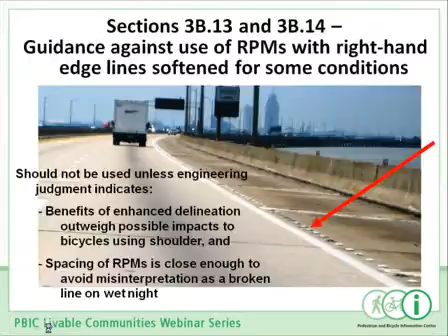Again, the safety study by UNC was quite clear on this, and the way it's written in the manual now is to apply to new marked crosswalks. In other words, this criteria should be used in decisions that are being made from now on of whether to put in a crosswalk. As we all know, there are many existing marked crosswalks out there under these conditions that don't have other substantial measures with them. It's obviously good advice to try to at some point go back and reevaluate all of those existing locations. But the words that are in the MUTCD as of now do not require that yet.

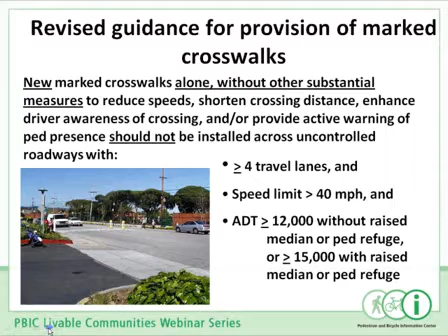There is a whole new chapter that's been added to Part 3 dealing with pavement markings at roundabouts. And of course this affects pedestrians and bicyclists because of the operation of a roundabout. The text and the figures all address the locations of the crosswalks adjacent to the roundabout, what to do with bike lanes approaching a roundabout. So a lot of new standards, guidance and options concerning pavement markings at roundabouts.

Colored pavements is a kind of a continuing issue, has been for some time. There's a lot of interest in using colored pavements for various things. And particularly at crosswalks, there has been an issue that really started out with the idea of brick crosswalks. A number of communities for some time now have been installing brick crosswalks really as part of their streetscaping projects for aesthetic enhancements. It's really not intended to try to communicate a message to pedestrians or to drivers.

It's predominantly for aesthetics. And under those situations, as long as you've got the white lines that actually establish the crosswalk, there's no issue with putting bricks or other types of colors or patterns within the crosswalk, as long as it doesn't compromise the conspicuity or the contrast of those white crosswalk lines, and as long as the color is not a traffic control color.

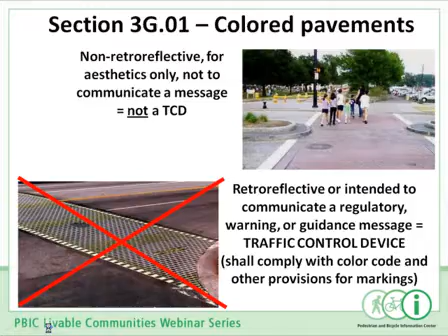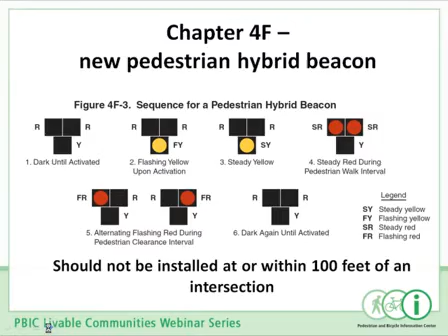This is a new provision. It's always been good engineering practice, but now it's in the MUTCD as a requirement, and that is that if the timing of the pedestrian signals is only giving pedestrians enough time to cross to the median, basically requiring them to cross in 2 separate stages, 2 separate cycles, then it's now required that pedestrian signals, push buttons if it's an actuated phase, and signs are required in the median. It's basically not appropriate to strand a pedestrian in the median and hope that they figure out what to do.

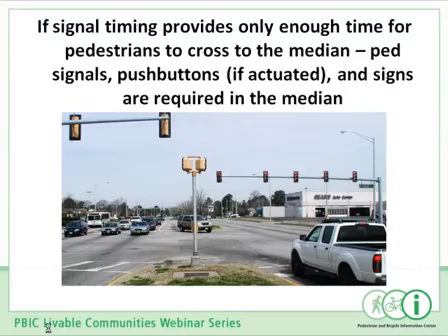In the proposal that we had put out in 2008 for the text of the next manual, we had proposed changing the meaning of the flashing orange hand when it's accompanied by a countdown. The issue is obviously that in a sense we're sending mixed messages here.

The previous meaning of the flashing orange hand is that if you're still on the curb and haven't started crossing yet, you're not supposed to start crossing. But if you have started, you're out in the crosswalk, the flashing orange hand means that you can continue crossing and finish. The countdown is really providing more information than has ever been provided before.

And obviously we know that pedestrian signals are timed based on a certain walking speed that many people can walk faster than. And we know that where countdowns are installed, a lot of people do leave the curb after the flashing orange hand comes on, and they are able to finish their crossing safely and well before the conflicting traffic starts moving. So we had proposed to change the meaning to basically legalize that.

Based on the comments we received, our decision was to not adopt that change. There are concerns, and very valid concerns, about having 2 separate meanings for the flashing orange hand, depending on whether a countdown is present or not, and concerns about the ability to educate particularly young school children when we have 2 separate meanings like that.

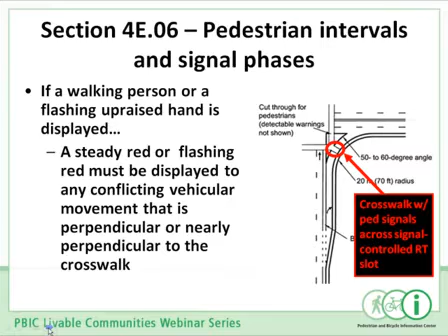It's definitely a conflict. So anyway, now there's specific language in the MUTCD to require that either a steady red or a flashing red has to be displayed to any conflicting vehicular movement under this kind of a situation.

We talked about walking speed of pedestrians. You're probably aware of some of the studies that have been done that have found that the 4 feet per second, which has been in the past the recommended walking speed for calculating pedestrian clearance time, doesn't provide for a large enough percentage of the walking population.

And there's a new figure in the manual, figure 4E2, which kind of clarifies and hopefully makes it easier to understand the relationship between the pedestrian intervals and the vehicular intervals. This is a fairly complex and complicated issue that a number of people have had difficulty understanding.

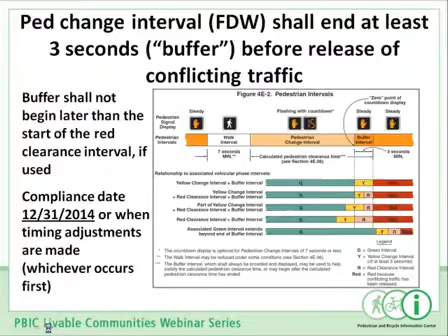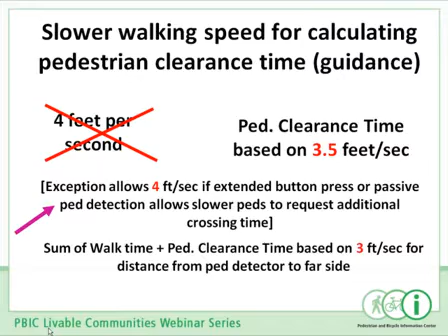And one thing I did want to mention about this exception, there is an exception that allows the use of a 4 feet per second walking speed to calculate that pedestrian clearance time if you have an extended button press or some other means to allow the slower pedestrians to request additional crossing time.

And I just wanted to point out that this is not what we're talking about. We're not talking about having to pay to insert coins to receive your extra crossing time. It's really just a matter of an extended button press, as in that sign that Bruce had displayed earlier.

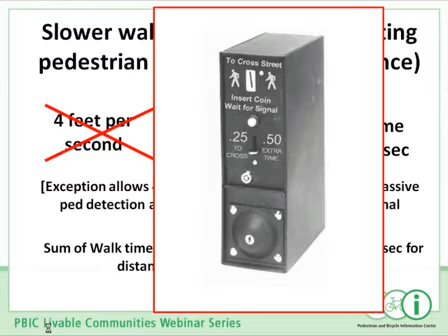The leading pedestrian interval is now in the MUTCD. Again, this has been a rather common practice that really wasn't in conflict with the MUTCD in the past, but now there's words in there that specifically allow it and describe how to do it.

The countdowns are now required for all pedestrian signals where the pedestrian change interval is more than 7 seconds. You can use countdowns even if the pedestrian change interval is 7 seconds or less. So basically, many cities are installing the countdowns for all of their pedestrian signals. We know that. But there are some jurisdictions that are concerned that for particularly short crosswalks across narrow streets it might be unnecessary to have a countdown for those conditions. So that's what this provision says, that if it's less than 7 seconds, there's no need for a countdown.

And there is no specific compliance date for retrofitting all the existing pedestrian signals that don't currently have countdowns. That can be done when the ped heads reach the end of their service life and are replaced. But in reality, many, if not most, jurisdictions are proceeding straight ahead, basically, with putting in countdowns almost everywhere because they are so popular and they do have a good safety benefit.

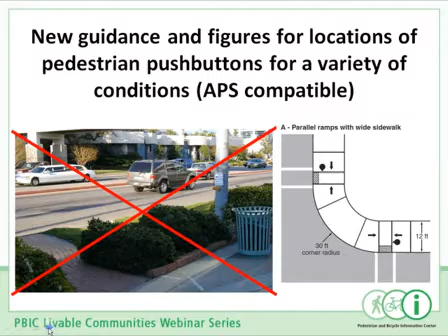So the new manual does basically provide more specific guidance on the location of pedestrian push buttons, tightens it up considerably, and pretty much follows the guidance that had been in the MUTCD earlier concerning APS, accessible pedestrian signal push buttons, very similar to that. And as Bruce had mentioned, the signs that are used with the push buttons are now required to clearly indicate which crosswalk is activated by which push button.

Now APS, talked about that a little bit. The provisions concerning APS have not changed a lot since the 2003 manual. There have been some changes, but one of the main things we did is we combined and reorganized the information on APS into these 5 new sections, and basically makes the material a lot easier to access and follow when you're trying to find provisions concerning APS.

The push button locations, again, similar to what was in the 2003 manual. Basically, they're supposed to be as close as possible to the crosswalk line that's furthest from the center of the intersection. That's shown with the red arrows here. And if there are 2 buttons on the same corner, they have to be separated by at least 10 feet, unless the physical constraints make it impractical.

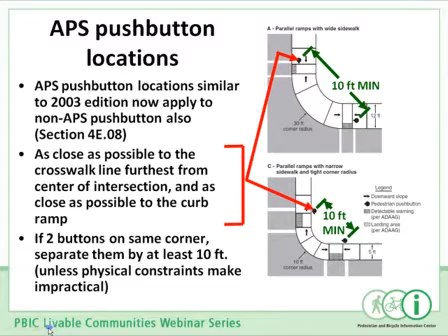APS walk indications, when the walk signal is on. The accessible walk signal has to be both audible and vibrotactile, and obviously the same length, the same duration as the walk interval. The audible type walk signal is now to be a percussive tone, the ticking sound.

Now, the exception to that is if there are 2 buttons on the same corner that can't be located 10 feet apart or more, or if it's on the same pole, then a speech walk message needs to be used rather than audible tone. And the speech walk message goes: street name, walk sign is on to cross street name, with the street name, of course, being the name of the street, like Broadway or whatever. The reason is that when the buttons are closer than 10 feet apart, blind pedestrians have a very difficult time discerning where the ticking sound is coming from. And of course, the vibrotactile walk indication is the vibrating tactile arrow.

The tactile arrows have to be located on each push button. They have to be aligned parallel to the direction of travel on the crosswalk that it's associated with. The locator tone has to be incorporated into each push button, and obviously operates during the intervals other than the walk interval.

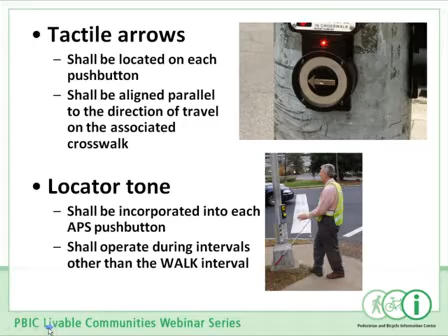The extended push button press is a new way that's in the MUTCD now to call special APS features. You can use it to call for a longer crossing time. You can use it to call for a speech information message. Now that's different from a speech walk message. The speech information message can give information, for example, about the geometry of the intersection, things like that.

And you can also use the extended push button press to call in audible beaconing. The information message, as I mentioned, is only used during intervals other than the walk. The message format is "wait to cross Broadway at Howard," and things like unusual geometry and phasing can also be talked about. So that finishes the markings and signals part, and I will turn it back now to Bruce to go on with the other parts of the MUTCD.

Okay, you'll notice that we seem to have skipped from 4 to 7, leaving 2 other numbers out of it. Part 5, there really weren't a lot of changes overall, basically just keeping it up with the other parts because it overlaps so much for low-volume roads. Part 6 had some changes, not all that many, but none of them were particularly about pedestrians and bicyclists. So we'll leave those out of this presentation as well and move on to Part 7, which is school area traffic control devices.

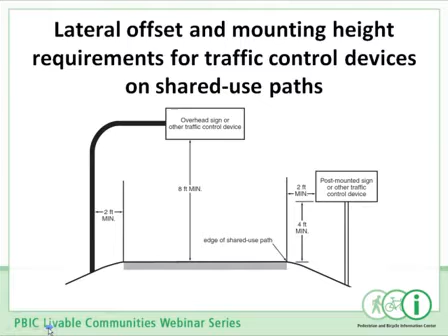The use of bicycle lane regulatory signs and plaques is no longer required where marked bike lanes are present. It is now okay to use pavement markings alone to designate a bike lane. There are recommendations that have been added regarding the placement of bicycle lane signs and plaques if an agency does decide to use them. These changes provide flexibility for agencies that don't desire to use the bicycle lane signs, but they don't restrict the ability of jurisdictions that prefer to use the signs to continue to do so.

And as a result of this change in Part 9, we also had to go back to Part 1, where all definitions are, by the way. At this point, there are no more definitions within the individual parts. But back in Section 1A13, the definition of a bicycle lane was changed to indicate that it could be designated by pavement markings alone, and that signs may be used to supplement those markings, but are not required.

There's a new Bicycles May Use Full Lane sign that's been added for use in locations where it's important to inform road users that the travel lanes are too narrow for bicyclists and motorists to operate side by side. This is a sign that can be used in conjunction with the new shared lane markings that I'm going to be talking about in a few minutes. But they aren't required to be used together. One or the other can be used alone, or both can be used in combination.

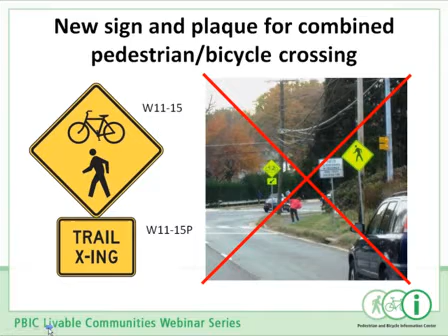Consistent with the proposed changes in Chapter 2C that I talked about earlier in the presentation, the new combined bicycle pedestrian sign and the new trail crossing plaque are also added in Part 9 to provide warning of shared use path crossings that are used by both pedestrians and bicyclists.

There's a new section about object markers for use on shared use paths, and basically what this does is create a smaller size, proportionally reduced so that it would be more appropriate for the lower operating speeds on shared use paths. In fact, the signs are 6 inches wide and 18 inches tall rather than the larger signs that are used for roadways.

Several new bicycle destination guide signs, along with information about their use, were added to provide flexibility and potentially reduce the cost of signing bicycle routes, particularly in urban areas where multiple routes might intersect or overlap each other. Among these signs are new alternative guide signs for bike routes and new bicycle destination and distance signs.

Similar to the object markers, there's a new section regarding reference location signs for use on shared use paths, because some of the paths are long enough and are linear enough that they lend themselves to the application of these reference location signs. The signs, again, are proportionally lower in size based on lower operating speeds, and they use a 6-inch wide panel with 4.5-inch tall numerals.

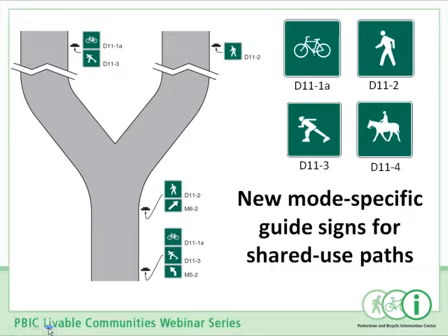There's a new section that's been added regarding 4 new mode-specific guide signs for use on shared use paths. This section contains information regarding the use of signs that guide different types of users to separate pathways where they're available. Currently, the manual provides only signs that prohibit user types, not signs that show which types are permitted. As a result, jurisdictions have commonly installed a variety of non-standard mode guide signs. We also added a figure to the manual that shows how these new standard signs might be used.

There's a new bicycle route sign, which is M1-8A, that's been added. It retains the clear, simple, uniform design of the M1-8, but it provides a space near the top of the sign where you can put a pictograph or words that are associated with the route or with the agency that has jurisdiction over the route.

There's been a significant amount of interest in allowing agencies to develop unique or distinctive route number signs for bicycle routes, much in the same way that states can design their own route number signs. The M1-8 sign is retained in the manual, though, as there are some agencies that don't want to put the distinctive pictograph symbol or wording.

The design of the U.S. bicycle route sign has been revised. Basically, the larger bicycle symbol is now being used on the top part of the sign, and what used to be the large route number is now a smaller route number at the bottom of the sign. The reason for this change is to give the motorist an immediate impression of a bicycle numbered route rather than a highway numbered route that can also be used by bicyclists. And it also provides consistency with AASHTO's recommended design for the sign.